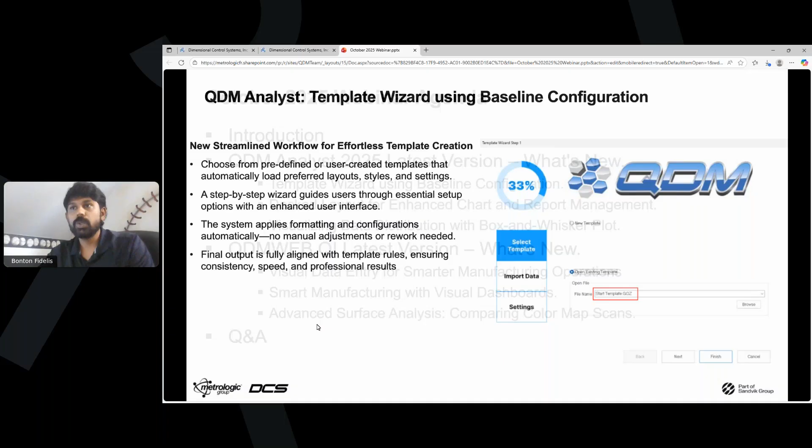Now, going right into the QDM Analyst software. In this version, we have the template wizard using the baseline configuration. What it does is the user can have a predefined template with some settings, layouts, their logos, and their preferred style of fonts.

And then we also have this step-by-step wizard, which goes through the setup. If you have a CAD file and a data file, you can easily set up this template within a matter of few seconds, which I'm going to show you. The final output is fully aligned with the template rules, and it also reduces the time needed to create a template.

So having said that, let me quickly go into the software. This is our latest release, and over here we have this template wizard option where I can quickly click, and now it brings up the template wizard. So now we have an existing start template that we have. You can also import your own template if you want, but now I can quickly click next.

I can give a project title. I'm going to give it as QDM Webinar 2025, and I want to import graphics. So over here, I am going to choose this block casting part that I have, and I'm going to click import data, and I have this block casting data file which can be imported. So now this data file can be any file that's coming out of your CMM system. I can click open. So now I have the CAD file and the data file.

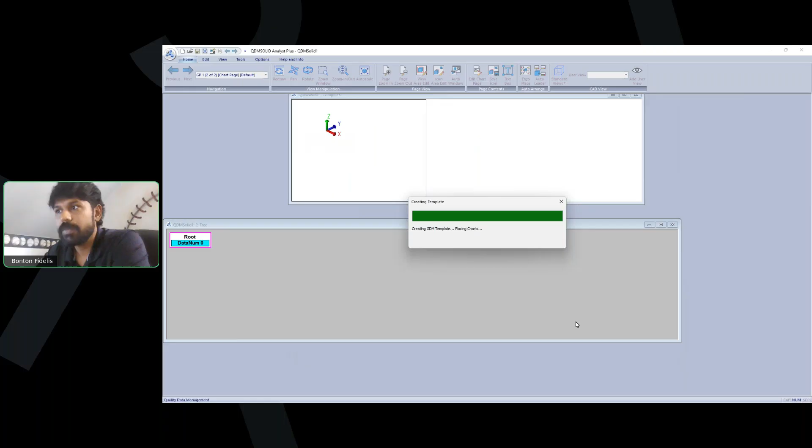So I can click finish, and now within a matter of a couple of minutes, I have created a baseline template that can be used as a means to do their analysis in the QDMWEB QI system. So it's a very simple tool, very intuitive tool. With your CAD and your data file, you can quickly generate this template within a matter of few minutes. It probably hardly took me like a couple of minutes to create this report. It also reduces your template creation time into like it cuts your template creation time to like 60 to 70%, and you can then do all kinds of fancy things from these reports if you want.

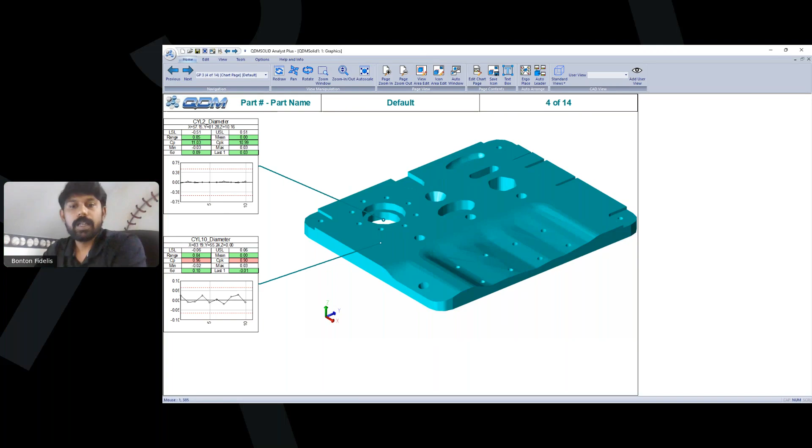So now going back to our webinar. This is the first thing that I wanted to show you. Now the next thing that we have is a dock layout for enhanced chart and report management. What this dock layout means is now I can have a layout which is docked on the left side of my screen, and then I can also click a chart and work on that chart simultaneously.

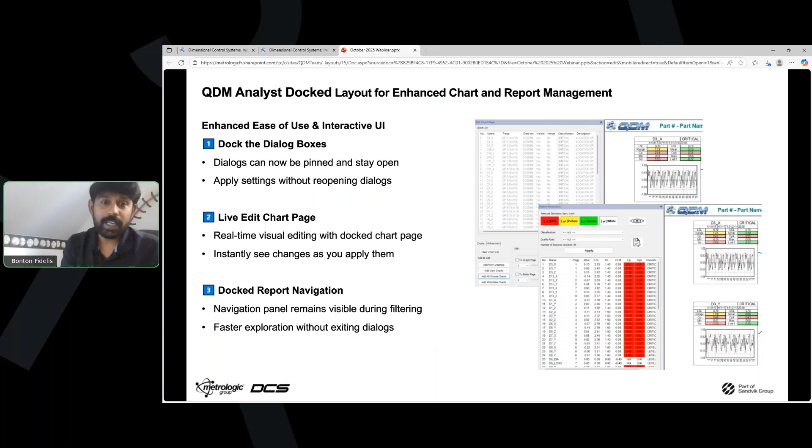So meaning, let's say if I have like 10 charts that I'm clicking, you don't have to close the screen, see if the report is fine, and then go back and open the screen again. So in this latest version, what we have done is we have created a docked report. So I can click edit chart page, and I can click add new chart. You see how the layout is docked on the left side.

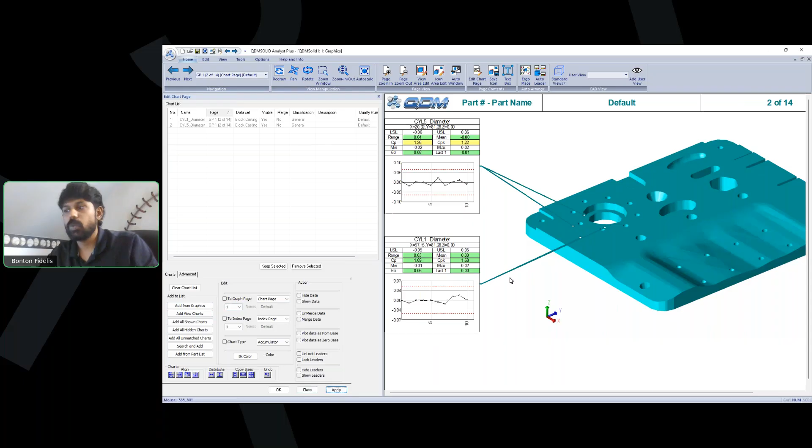So now I can click add new charts. I can say add all shown charts, and let's say, you know what, I have these two charts that is in the second page that I would want in my first page over here. So I'm just going to click keep selected, and I'm going to say add this to the first graph page. Okay, and I can click apply. So what it did is it moved these charts here since it's on top of each other.

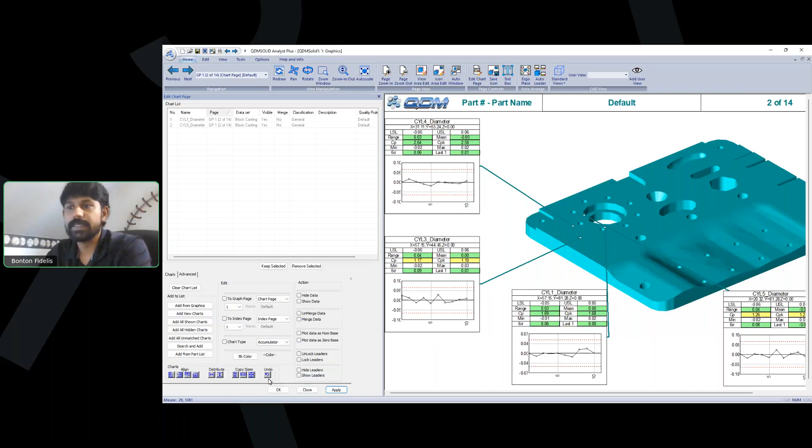So you see, I'm working on the left side, but I can also see the results on the right side. That's the real benefit of having docked layouts. It's easy for a user to see what they do, the actions on the left-hand side, and then the output would be on the right-hand side. So that's beneficial from a user's perspective. So I can click OK.

We also have this edit report in our report navigation page. So let's say if I have some data that I want to analyze. Let's say I'm interested in this diameter feature. Oh, my CP and CPK is really good.

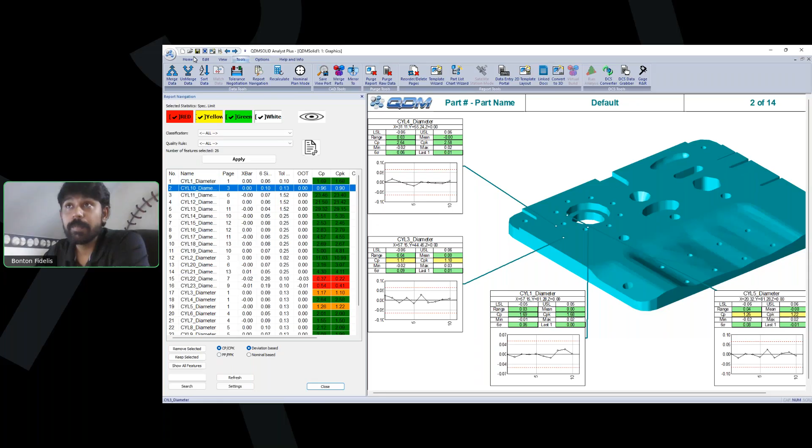My diameter 10 feature has a CP of 0.96 and CPK of 0.90, and it tells me where that report or feature is located. I can quickly go to page number 3, where I have that chart, so I can quickly look at the run charts as well. This reduces your time analyzing data. I can see the report navigation page, see where that chart is, and quickly go to it.

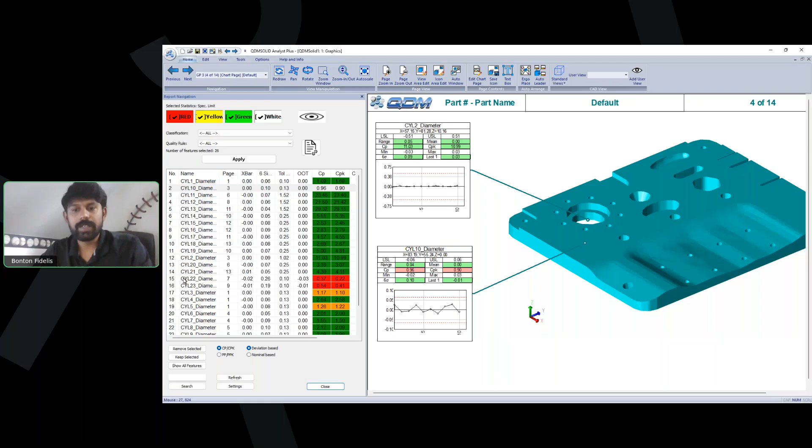So this is the second feature that we have introduced in this latest version of QDM Analyst.

Now the third feature I want to talk about is visualizing data distribution with the box and whisker plot. We had the composite chart before, but now we've also introduced the box and whisker plot for large amounts of data.

Let's say if you have 100 samples and want to view that visually, a run chart would be interesting, but sometimes it's too much for the user to analyze. A box and whisker plot makes it easier to view the spread, the median, and the outliers instantaneously, giving that information very quickly, and it's also easy to integrate with other chart types.

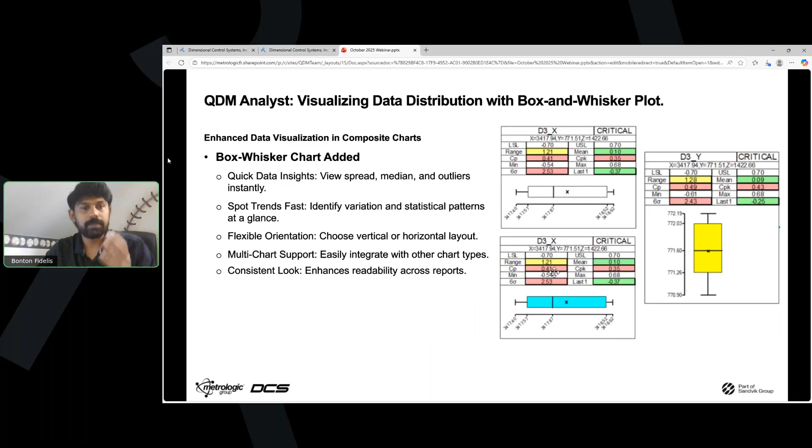When you look at a report, it enhances readability as well. So it's a very good feature for a quality engineer to have in their realm of tools. Let me go back to the QDM Analyst software.

I'm going to quickly close this. Let's say if I want to have these two charts, instead of a run chart, I want to change it. In chart settings, I want to change it to a box whisker plot.

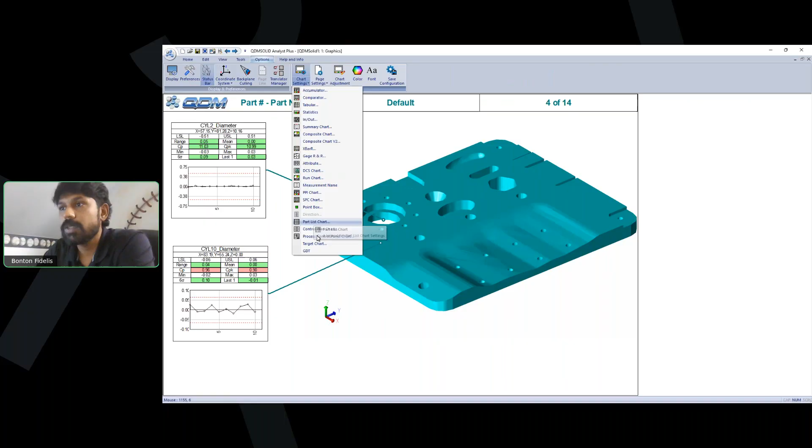I can go to composite chart, and now we have this option of a box whisker plot. You can display it as horizontal if you want. Let's say I'll just do it as vertical, but if you're interested in a horizontal layout, you can do that as well.

So now I have a box whisker plot, and in this case I only have 30 samples, but if you had 100 or 200 samples that you want to quickly analyze, this box and whisker plot would be a very useful tool.

From an engineer's standpoint, let me give a recap of what we saw in QDM Analyst. We have the template wizard - if you have a CAD or a data file, you can quickly create a template within minutes and upload that into our QDMWEB QI system. That's the first feature.

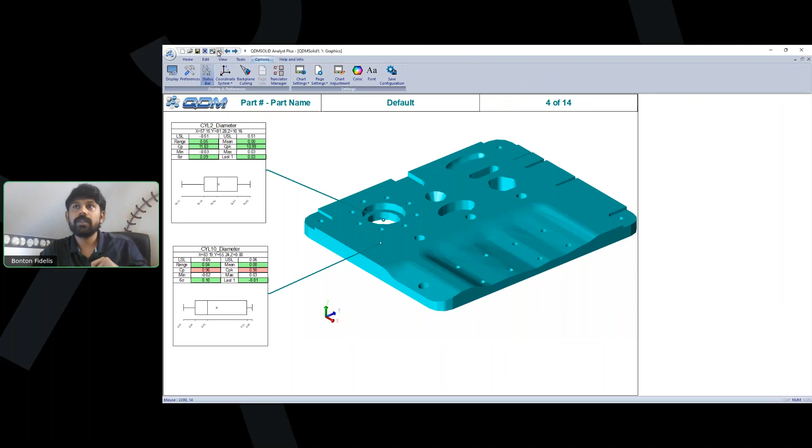The second feature is the docked feature that you saw. On the left-hand side is basically the input, you work on the charts you want to see on the right side, and the output is also displayed instantaneously. That's the second feature.

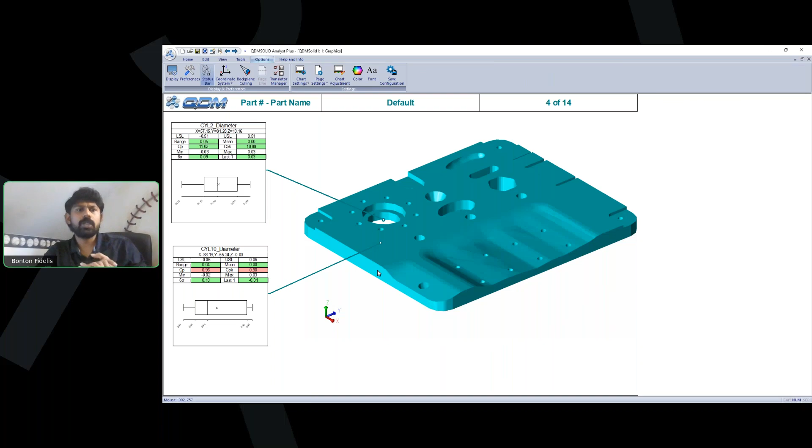The third feature here is the visualization of box and whisker plot. We've introduced this within composite charts, and we also have two options of vertical as well as horizontal layout, depending on the user. These are the new features I wanted to touch base on with respect to the QDM Analyst software.

The next slide would be with respect to visual data entry for smarter manufacturing operations. This is a new feature that we have in the QDM QI system. Basically, if you have a template with features associated with it,

the software will guide the operator to go from one feature to another more visually, instead of typing in the feature in an Excel-based format. It just shows you which feature you have to measure, and if you also have a gauge, like a digital gauge connected to your system, it records that feature as well.

So what's the use of this from a customer's point of view? It's easier to train an operator, whether new or existing. You can easily say, just go to the station, and you can quickly show an interactive, almost like an interactive training material for the user.

And also the interface can be tailored according to your needs. So let's say if you want just 3 features, you can have just 3 features. And if you want 10 features in a page, you can also have that. It's up to you, and you can update the CAD and the pictures according to your needs.

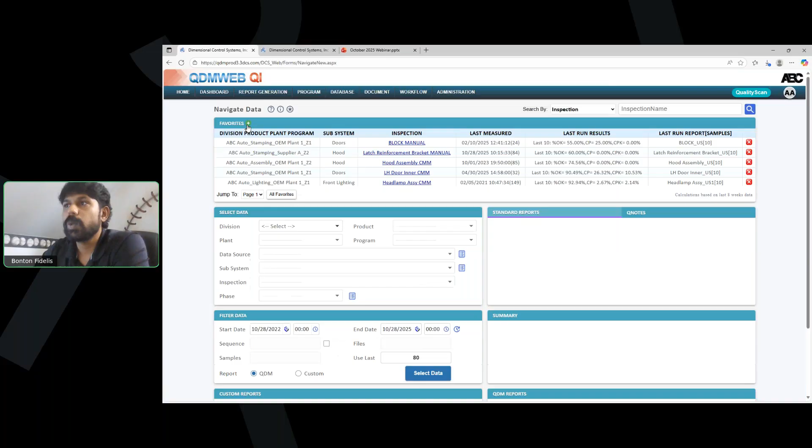Let me show you this example. Let me go to the QDM Web QI system. I'm going to quickly select this block manual from my favorites page. I'm going to select the existing 14 data that I have, and over here I'm going to click Generate Report. Now let's see the report first.

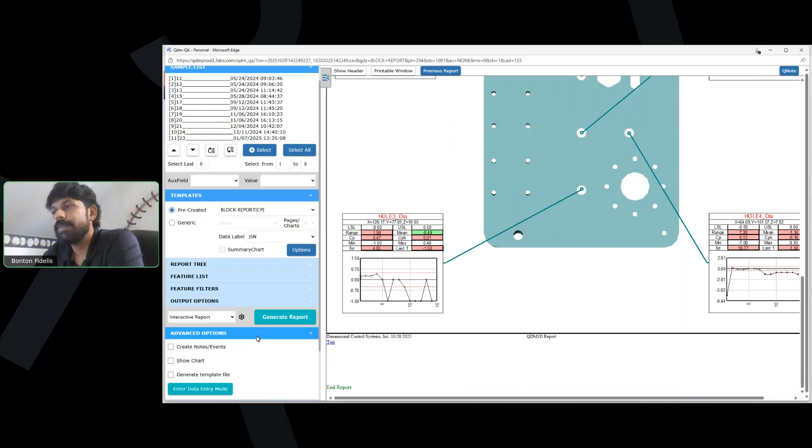Now I have this report with just 4 features. We have 4 holes, and we are measuring the diameter. So let's say I measure this part on a plant floor or shop floor where I have 4 holes, and the operator has a gauge to measure these 4 holes. But then he wants to know which hole should I measure first, and what do these holes correspond to? Because you don't want to measure hole 4 and then put it in hole 1.

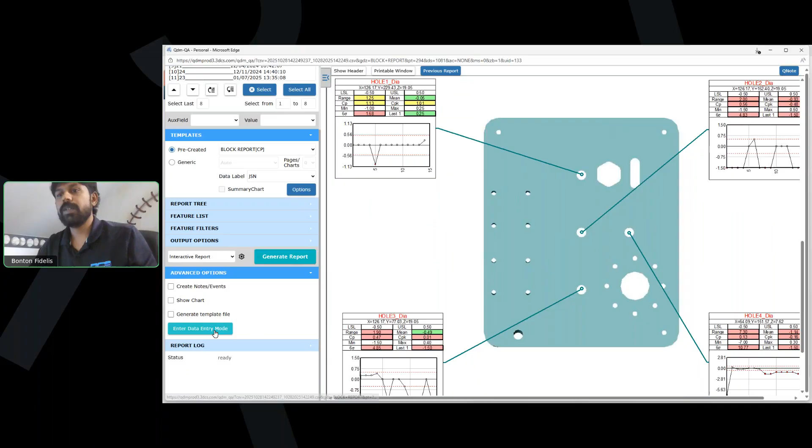So over here we have this enter data entry mode. I can click this. Now over here I have the operator — in this case it's the ABCAUTO_ADMIN. But if you have an operator account, it will show the operator account's name. I can type in the operator name. Let's say I'm going to type in Ben and confirm. Ben is working in shift 2. I can confirm and click this data entry mode.

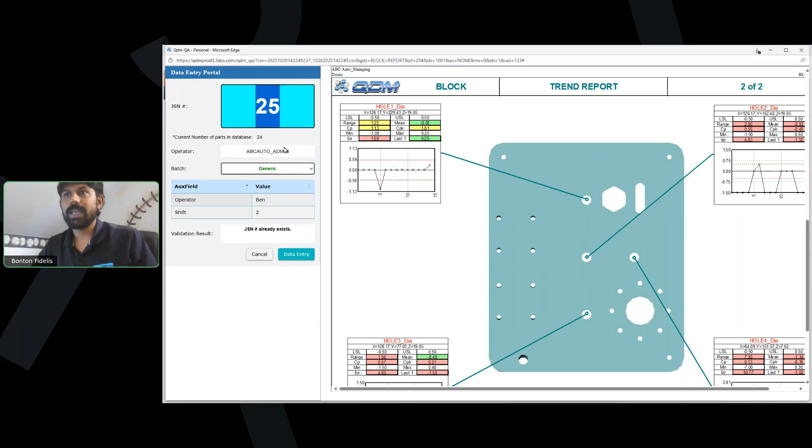So in this case we have a 25. Let's say I want to type in the JSN as October 2025. I can click data entry. Now what it did is it listed the 4 features, but also if you notice on the right side, I have a red box, which indicates you have to measure this hole first.

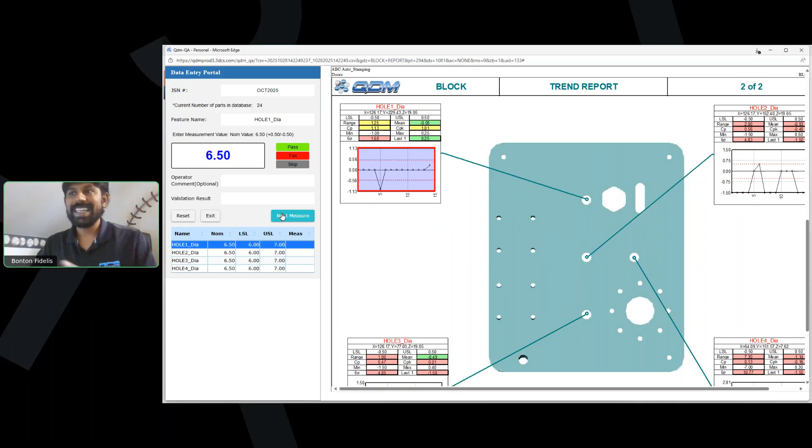So let's say if I don't have a gauge connected to the laptop, I can measure the part using a gauge and then type in hole 1. Let's say it passed, I can simply type in pass, or you can also type in the information. I'm going to go to the next measure, click next measure. Now what it did is it went to the next feature. So now I have to measure this hole.

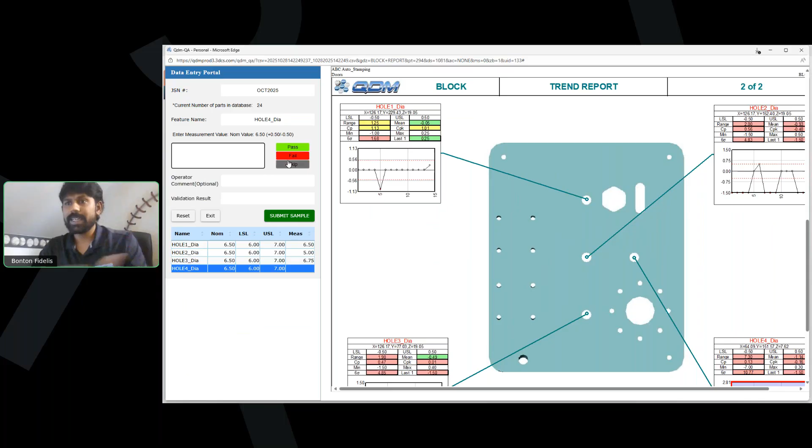As an operator, I'm going to go into the plant floor, measure it, and then use a laptop or an iPad from there. Let's say if this feature failed, I can quickly say fail. But if I'm just interested in typing in the feature, I can type in 6.6. You can also skip and then come back and type in. But let's say I just want to type some feature here, I'll type a number and click submit sample. Now what it did is it's submitting the sample that was entered into the system.

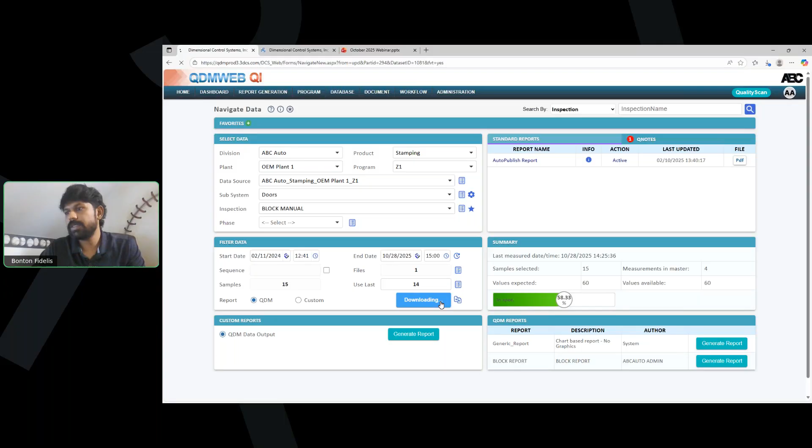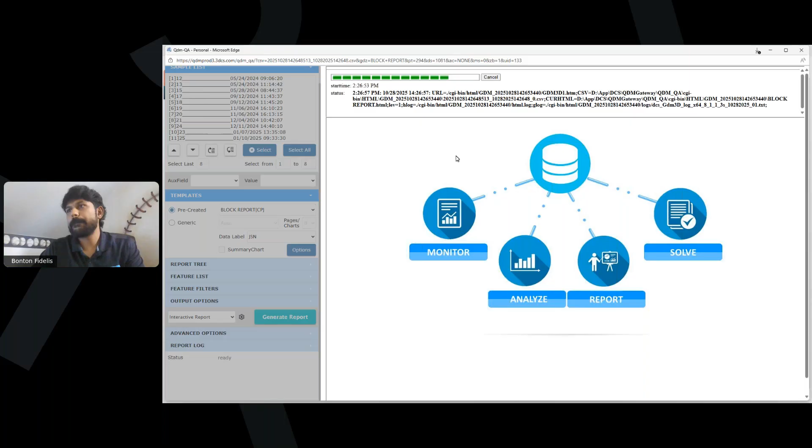So now we can quickly see — we can close this, come back. We have to change because the timing would have changed. Let's say I go here and see the Ben entry. Let's just change the time to something very recent, let's say 10. Type in, for instance... let me select the data here, report here. I can see that data that's entered into the system as well.

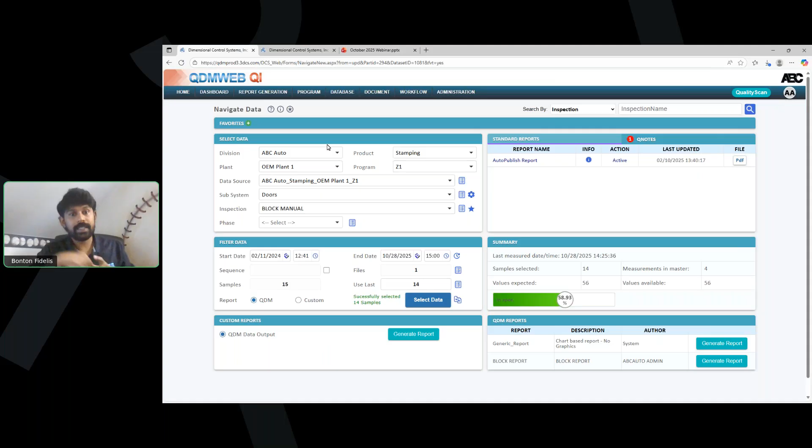This is a quick and easy way for the user to input the data into the shop floor. So if an operator is inputting their data in the shop floor, the quality engineer wants to see the data instantaneously. They can view the data from a different place. Let's say if they are in a lab, they can look at the data in a different place and view it instantaneously. Or they can also have this report embedded in a big screen, and whenever new data is measured, they can instantly see what's going on.

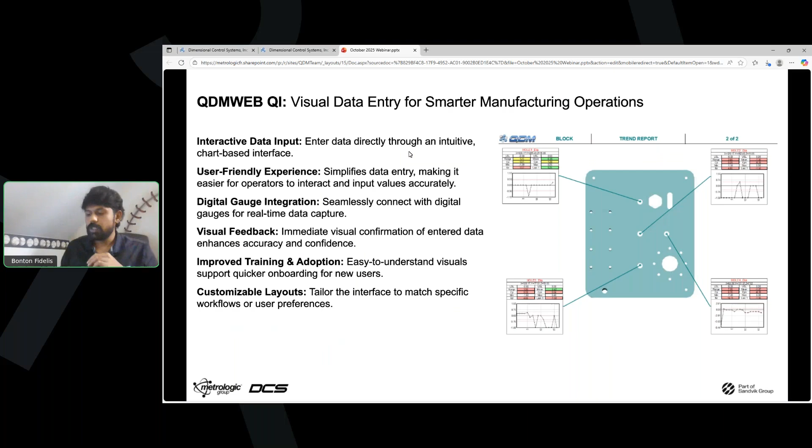So that's the first feature I wanted to show you with respect to visual data entry for smarter manufacturing operations. The next one is what we have as visual dashboards. What visual dashboard does is provide a more or less interactive navigation for QDM tools and reports.

So you can have an image. Let's say, for instance, I have a 2D CAD image of a car, and if I want to map the door, the hood, the windshields to their respective inspection programs in the system, I can definitely do that with a 2D image.

So what is the use of it? It has all the quality data resources in one visual hub. Also, from a user experience standpoint, you don't have to click or drill down into 3 different inspection programs. It takes time, so this reduces the time.

Within one image, I have 10 inspection programs. I can quickly go to that image and click each inspection program. It definitely reduces the time spent searching for quality data across platforms. The user doesn't have to type in each hood assembly, liftgate assembly, or door assembly - they can just click an image, and we can have 3 different links associated to that particular image.

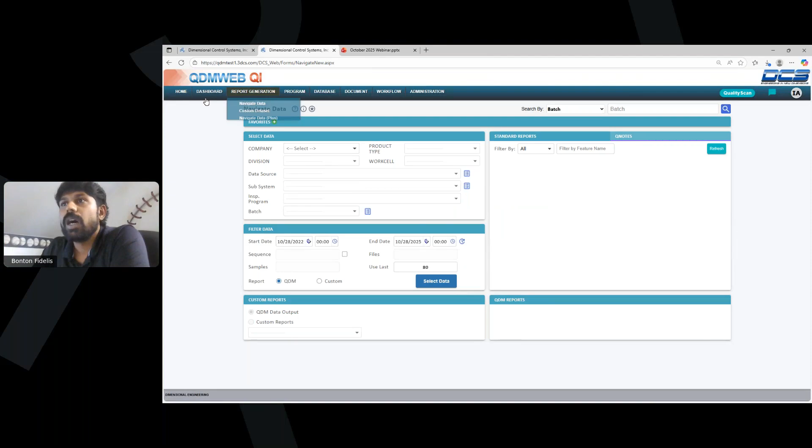So in order to show this demo, I'm going to click here, login. When we have this homepage option, we have this dashboard over here.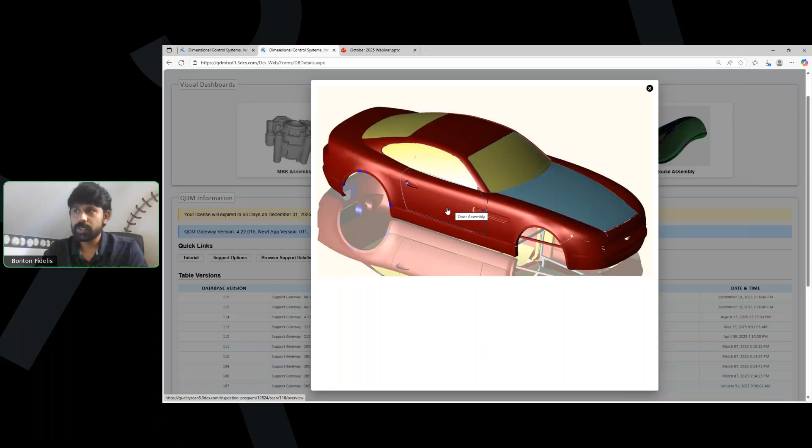So let's say I am the closures engineer, I come over here, I'm interested in this door assembly, I click it, and now it goes to that particular inspection program. For this particular door, I'm always interested in the scans, so I can quickly see what the report is from this page.

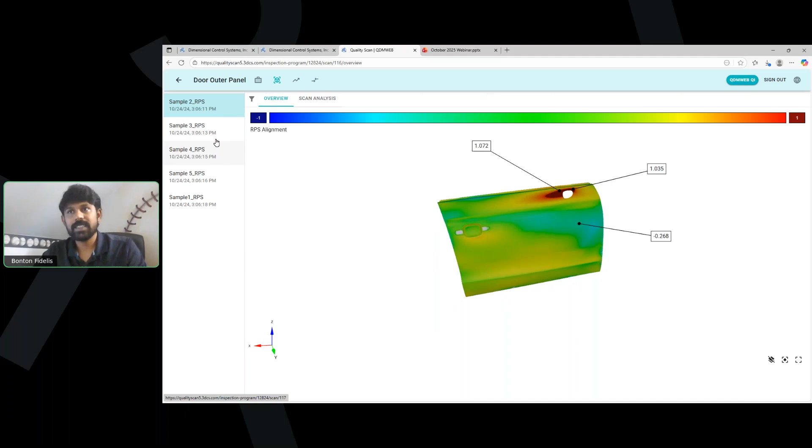Let's say I have 5 different scans in this particular module. I can quickly go through each sample at a time - that's one way of analyzing. So as a closures engineer, I click the door assembly and I was able to view the scans. Okay, now the next use case.

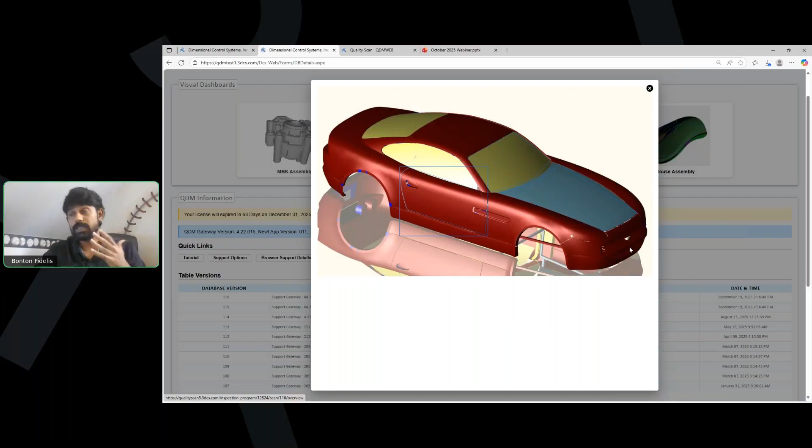I'm a quality engineer too - I come over here, hey, I'm responsible for the hood assembly, I just want to see the data. So the second user can come into the same page, click the hood assembly, and now it goes to the hood assembly part.

If you notice, I didn't have to drill down to a specific inspection program. It's the same image, it's intuitive. You can click the image and it goes to 2 different pages from the same image - that's the key over here.

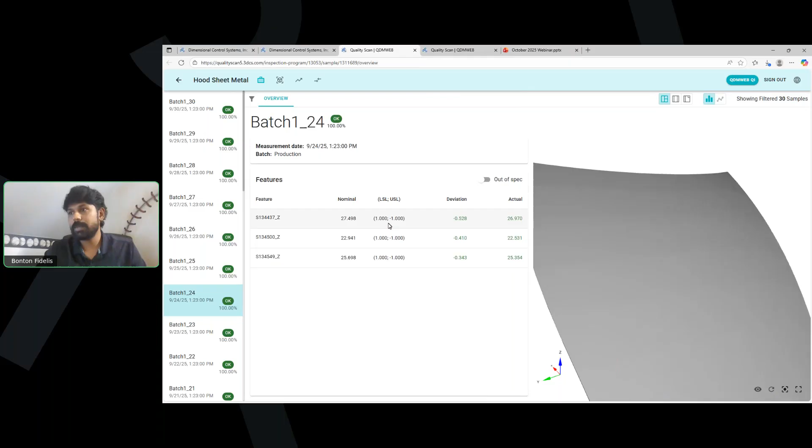So now, as the engineer of the hood assembly, I can quickly click the points I'm interested in, I'm interested in this particular sample. I can quickly view the CAD over here - looks like my features are all within spec. So as a quality engineer or dimensional engineer, I'm happy about it, right? It reduces their analysis time, or reduces the time needed to search for quality data across systems.

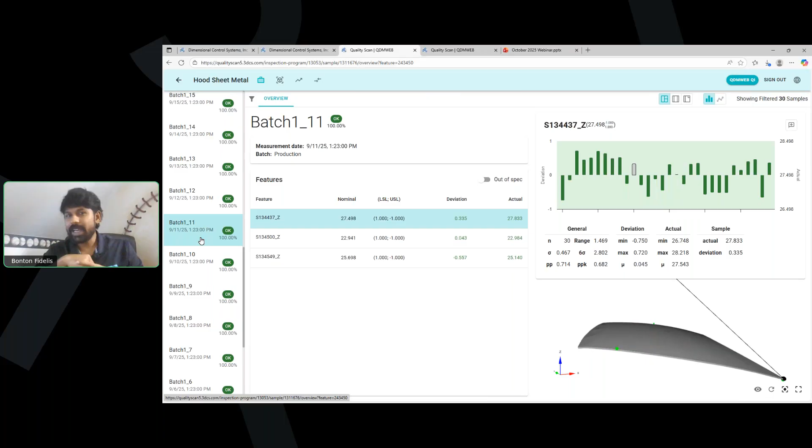Also, all these images are tailor-made - custom made for a user. So let's say it can be a CAD, or if you really wanted a real image of a car, or of a space, of a rocket ship - it's again up to you. The images can be endless.

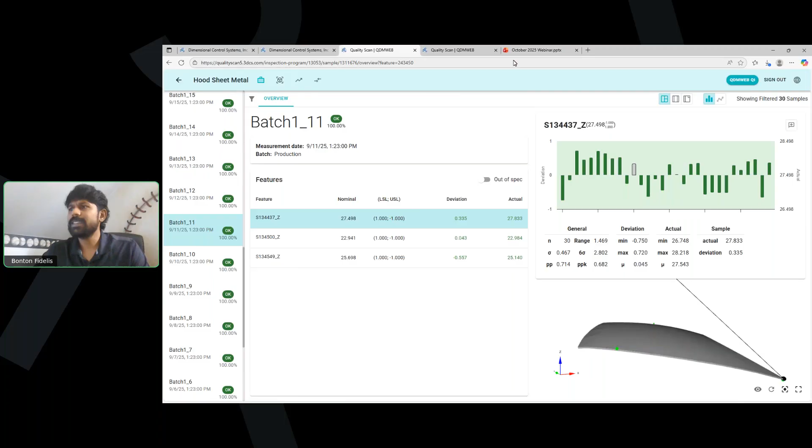You can do whatever image that you want, and it's all hosted within our QDMWEB QI system. So that's the second feature we wanted to show you, the smart manufacturing using visualized dashboards.

Now the third and last feature is the advanced surface analysis which we have. So we can compare color map scans. Let's say you have a color map scan and want to analyze it in a browser-based environment. That's a key feature here.

Also, let's say you have two color maps, one done before a die change and one done after, and you want to compare how the die change has changed these spots. That's another thing you want to compare. And also the third thing is, let's say I have a scan and I have CMM data, can I compare those two data side by side and do some kind of correlation? That's the third feature I'm going to show in this surface analysis.

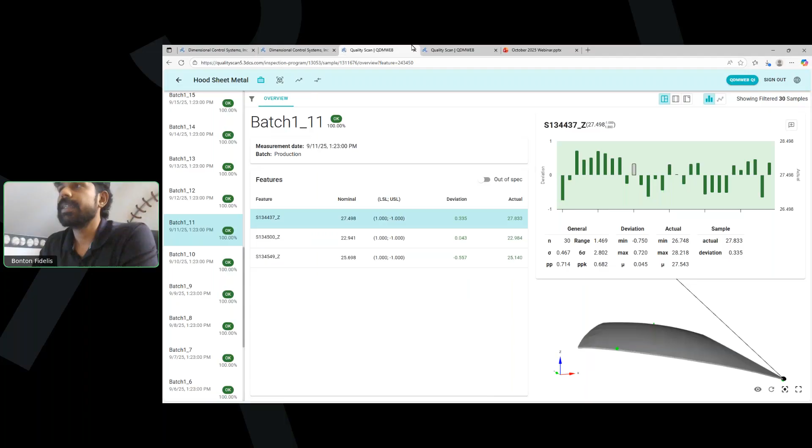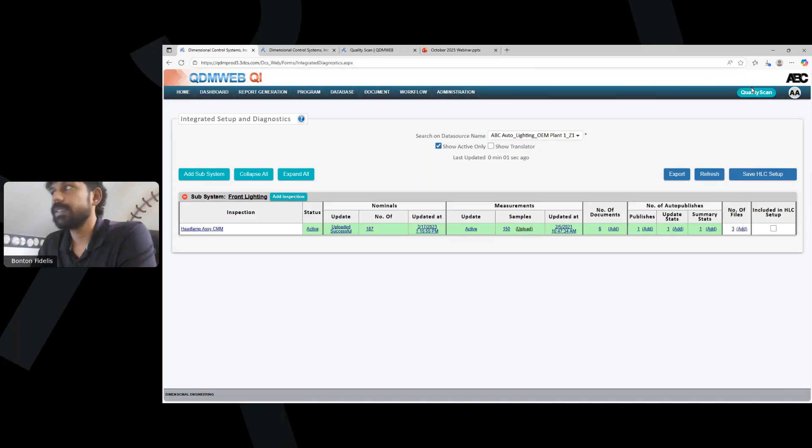Having said that, let me go into the software and show you that feature. For this one, I'm going to click here. I am going to click quality scan. Now I'm just going to type in door.

I'm going to use this, the compare views option. So now, as I said, on the left side I want a before die change sample, and on the right side I want an after die change sample. I'm going to select these two. Now, in the same screen, I have two samples that I can compare.

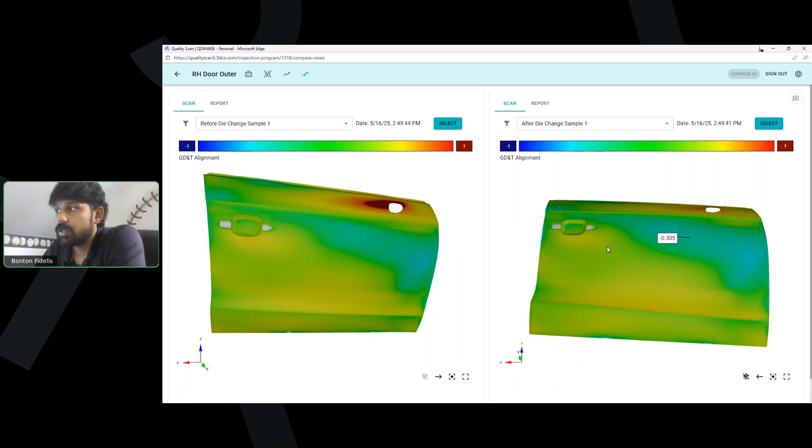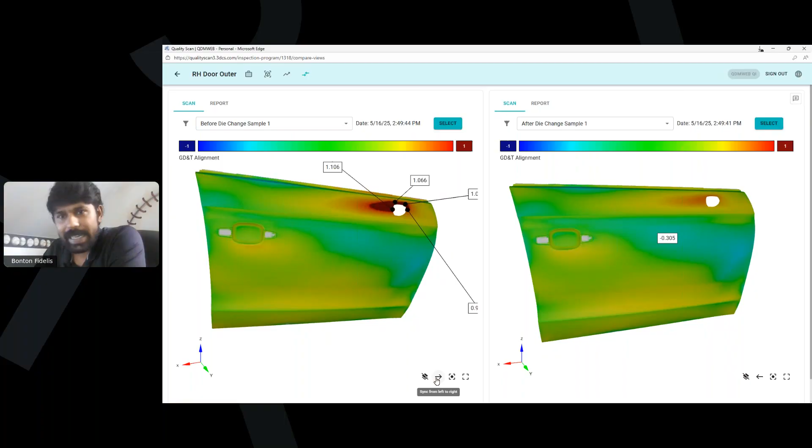Let's say I have this before die change, and I'm interested in these door handle parts. I can quickly select all 4 points. But now I want the exact same 4 points on the right side, and also the same view. So what I can do is quickly select this 'sync from left to right' option, and it chose the exact same 4 points.

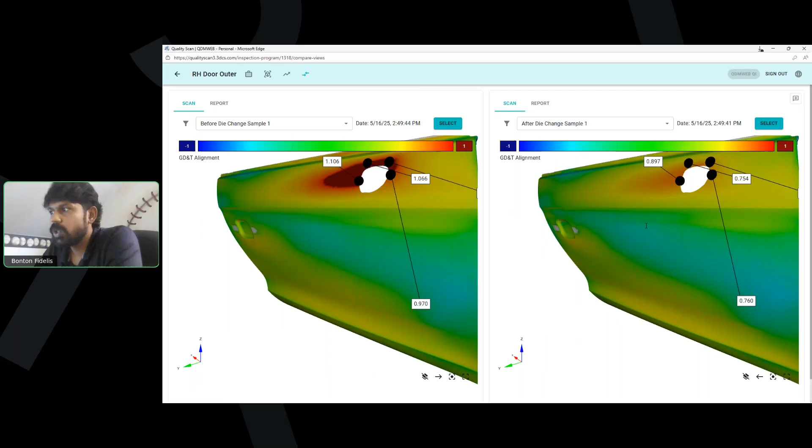So now over here, I have these 4 points. Let's say I'm interested in this particular view, and I want the exact same on the right side — I can click this button and it goes to the exact same view. You can add points as well, click this button, and it goes to that particular view, and we can also see the exact same points.

This again is helpful from a dimensional engineer's standpoint for comparing scans and doing some kind of root cause analysis with respect to a die cut or tool cut change, or also for any trim changes — anything they want to compare, like a before and after.

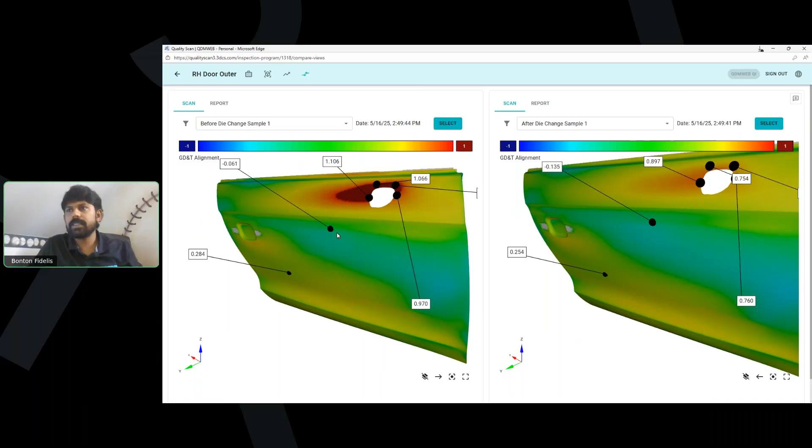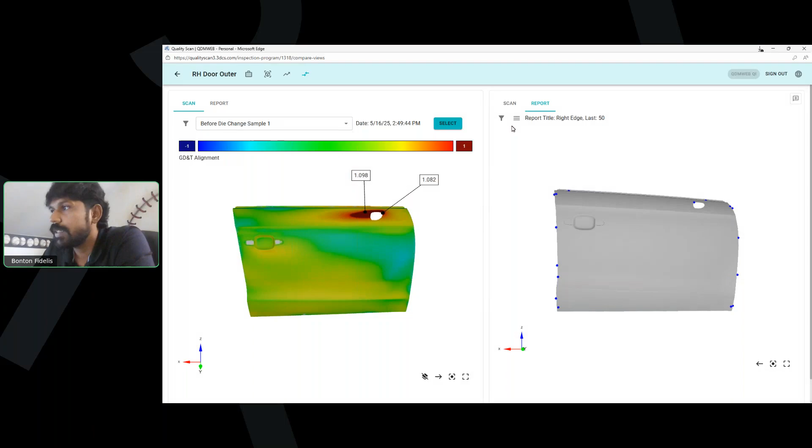That's one thing you want to do. The second thing is, let's say I want to compare this report. So I'm going to remove these points — I have a couple of points here, but now instead of comparing it to a scan, I'm going to select a report here. Let's say I have the right edge report here, and if I want to compare the points, I can quickly compare the points between these two.

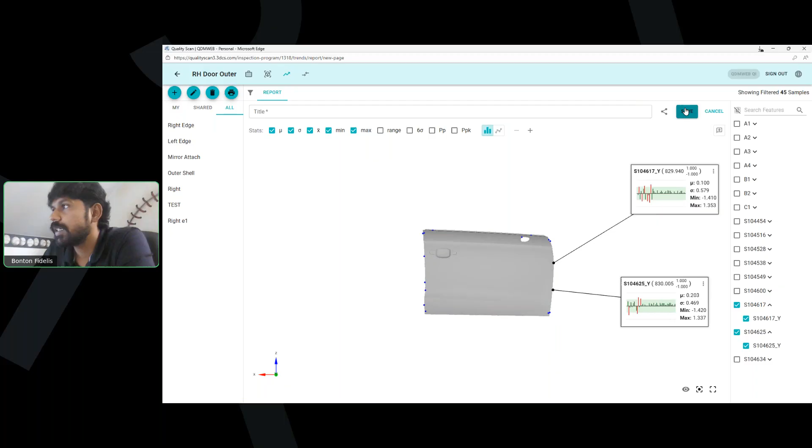I don't know why it's not showing, but let's say put the trend report, right edge report here, and select a couple of points. Select a couple of edges here, and select okay.

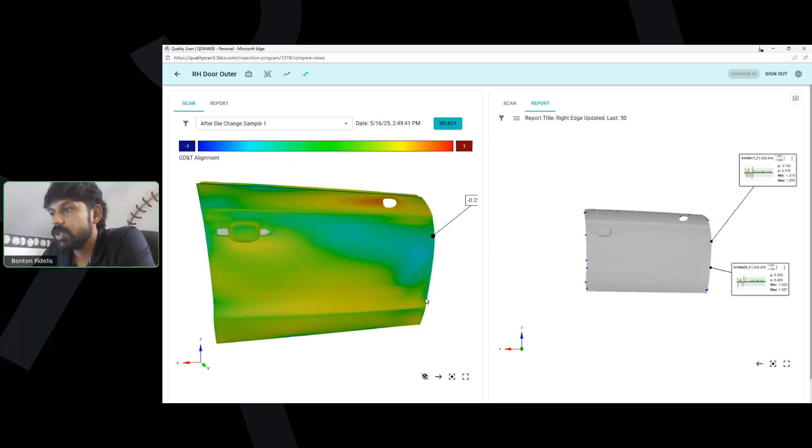So now I have this view here. Let's say I have an after die change sample that I want to compare, and also a report — let's say the right edge report. So now I have these two features. I want to compare these two points.

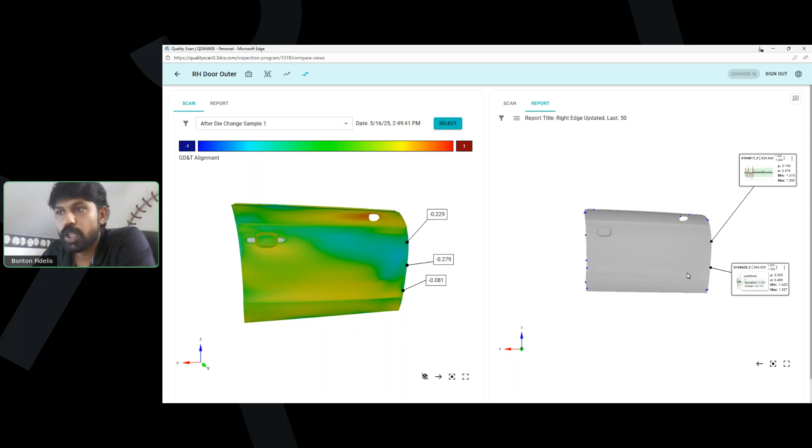So roughly you can do a correlation between 2 different systems that was associated. If you notice, my mean is roughly around 0.28, and over here it's also about 0.20. So with some level of confidence, you can say the measurement systems are almost the same — it's measuring the same across 2 different systems.

So this is a quick and easy way of doing a correlation between two different systems. So these are the three features that I wanted to show you.

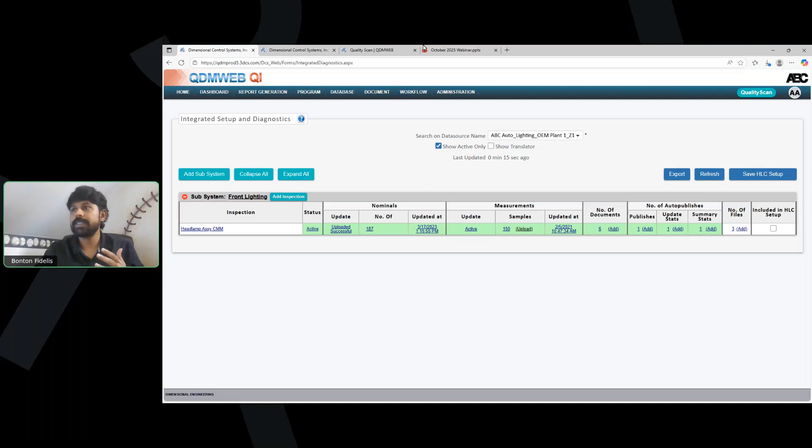So to summarize this webinar with respect to the QDMWEB QI system, the first feature that I showed you was data entry using a visual way of entering the data.

The second feature that I showed you was a smart way of visual dashboards where you can navigate to different inspection programs from one image.

The third one is comparing color map scans, where you can compare two different parts, like a before die change and an after die change. So these are the three features to summarize with respect to the QDMWEB QI system that we have.

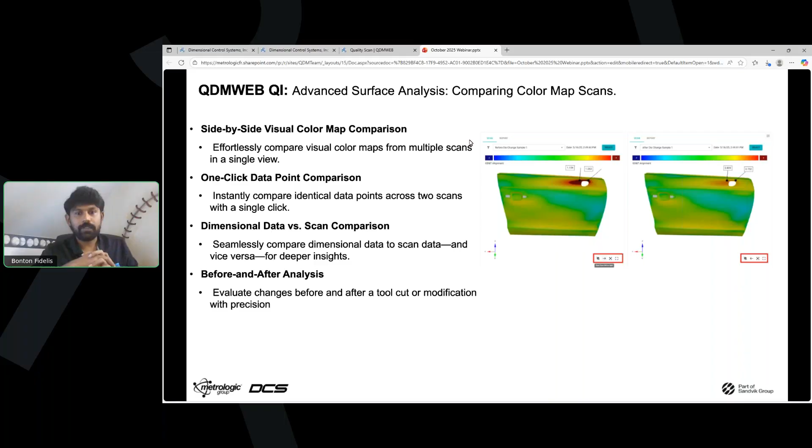We also have other features that were added to these two softwares, so if you're interested, we can have another webinar session as well. I think that's all we had for this QDMWEB webinar. So Ben, I think we have a few more minutes to take some Q&A.